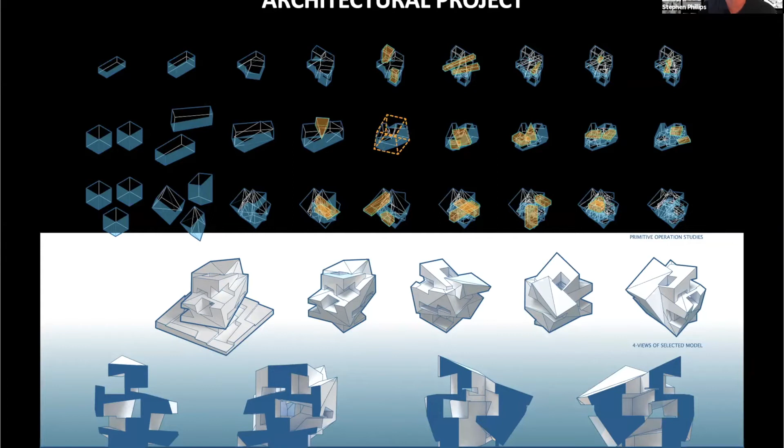Then we move into program and site. The building program is 600,000 square feet—a mixed-income housing, hotel, and office project. We also have social and health services, usually ending up on the ground floor, though placement varies by student. We have creative office space, retail, and a large public interior and exterior urban space, so it takes on an urban quality.

There's about 250,000 square feet of housing that includes micro-unit housing, transient hotel, boutique hotel, high-to-mid income housing, mid-to-low income housing, and transitional family housing. The services associated with that show up in our commercial and public spaces—public restaurants, cafes, retail, flexible creative office space, exhibition gallery spaces, and then indoor and outdoor public landscape spaces and parking.

The site is here on Main Street between downtown Los Angeles and the Fashion District, also very close to Skid Row, kind of in that transition between the larger territory of downtown and as it shifts towards more manufacturing and a lower density of scale.

The site itself, we took 12 stories as the FAR or height restriction. We also took about 50% porosity, which I'll explain in a second. And we took the entire site.

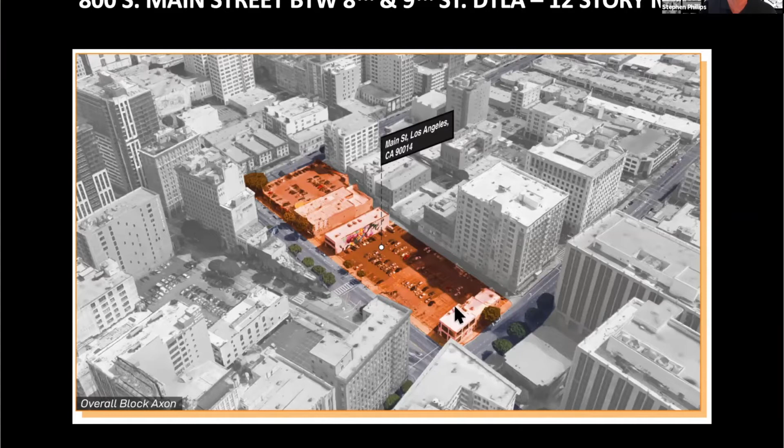It also has an interesting open space right in front of this territory, so most of the design is going to have elevational qualities as well as spatial qualities. There's an alley along the backside. This gives you an idea of Main Street, 9th and 8th Street, and the alley between.

We have basically a 625 by 175 foot lot, that's about 110,000 square feet. The program is 660,000 square feet. You're allowed to go up to 12 stories, so that enforces an engagement of open space and porosity throughout the building design.

That becomes sort of the creative architectural spaces of the in-between. That is really the conceptual part of the project. Every student has an architectural, conceptual, formal, material interest of their own, and then develops urban site strategies with a strong urban concept. It gets developed with an organizational programmatic concept that usually takes on a socio-political context, developing spaces in between of how you engage in that complex program dealing with density and varied community groups.

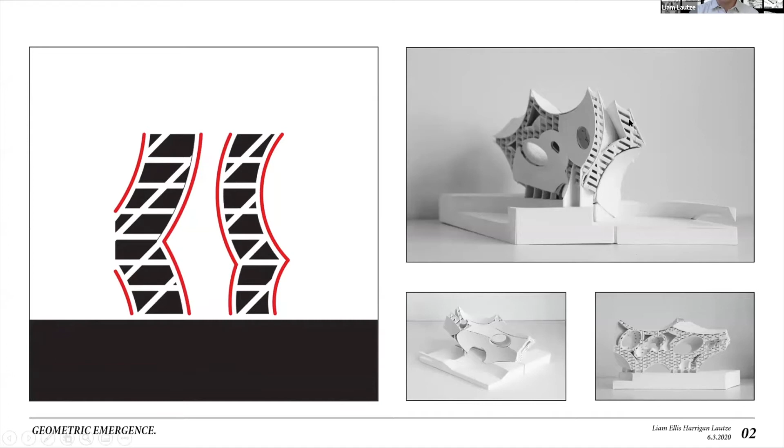The very earliest formal and spatial moves have been based on a kind of geometric emergence, where the interaction of a few spheroids in a grid create an exterior, an interior volume, separated by a semi-solid and gridded poche. You can see that configuration in the simulation model to the right.

These ideas are applied to the site of the project, which is on South Main Street in the Garment District. A diagonal and staggered grid is applied to the site, from which a set of spheroids subtract and create a second skin. Then another set of spheroids subtract more directly into the volume of the block with an intention towards affordance and program.

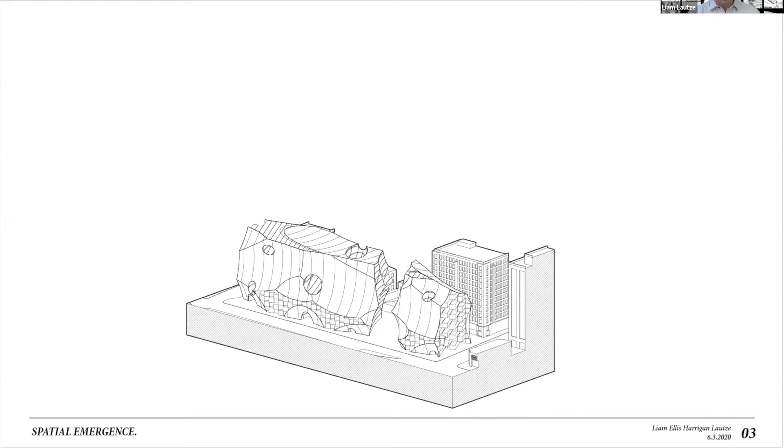That second skin is offset again inward, creating that same gridded moving poche and interior volume.

Now getting into the program of the project, it contains a diverse family of programs that includes multifamily housing, retail and office space, a boutique hotel, as well as job training and health services, as well as housing for people experiencing homelessness.

With this array of programs in mind, I wanted to understand each program's specific qualities in order to apply that same concept of emergence. On the ground floor is a job training program, a water storage cistern, and a flower shop.

The next 3 or 4 floors are commercial office space that partially bridge that interior void and form the ground floor into a kind of covered market.

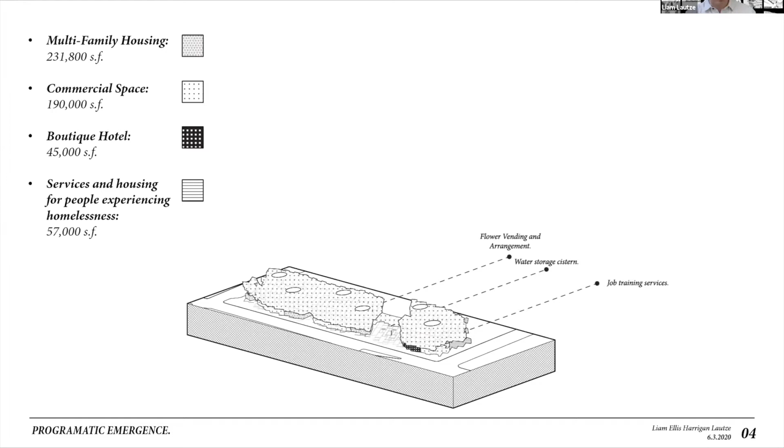Above the commercial offices is the multifamily housing, and these units can produce a significant quantity of water generated by the condensation associated with air conditioning.

Next, the housing for the homeless, or the transitional hotel as we're calling it in the studio, takes up half of the hotel chunk and contains a terraced flower garden. Last but not least, the boutique hotel takes up the remaining half of the hotel chunk.

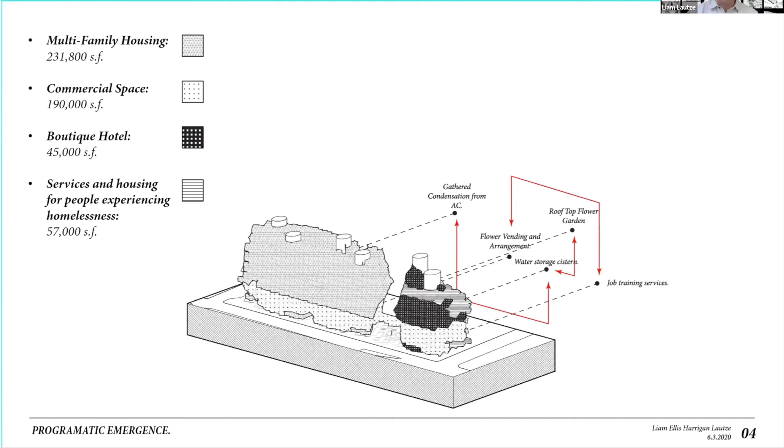Now we can begin to see how these diverse programs interlock, with the air conditioning providing water to the rooftop flower garden, the garden providing flowers to the flower shop, and that shop providing a venue for job training. This all emerges into a built-in self-sustaining job training facility.

Now that the greater programmatic whole is formed, the conceptual second skin and grid become a perforated metal facade and a modular prefabricated mass timber system. These come together to form Wave by Grid.

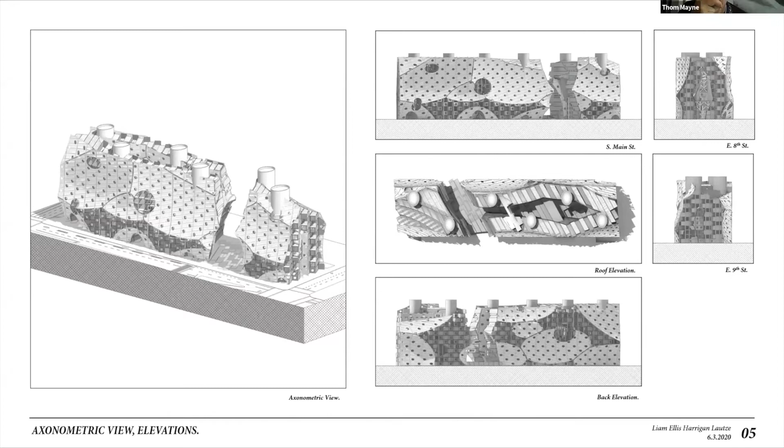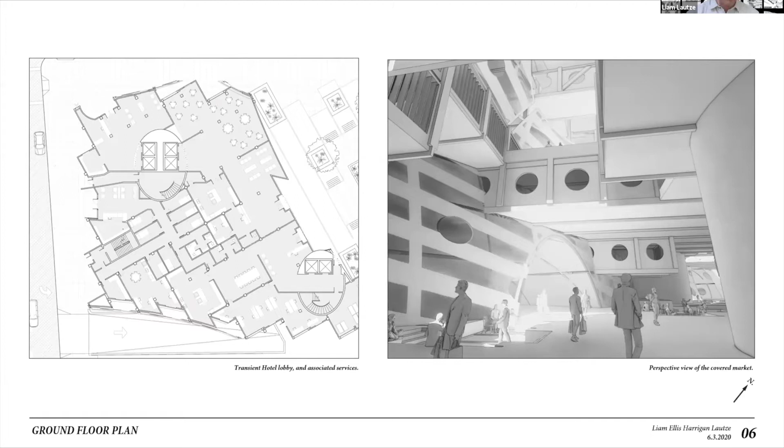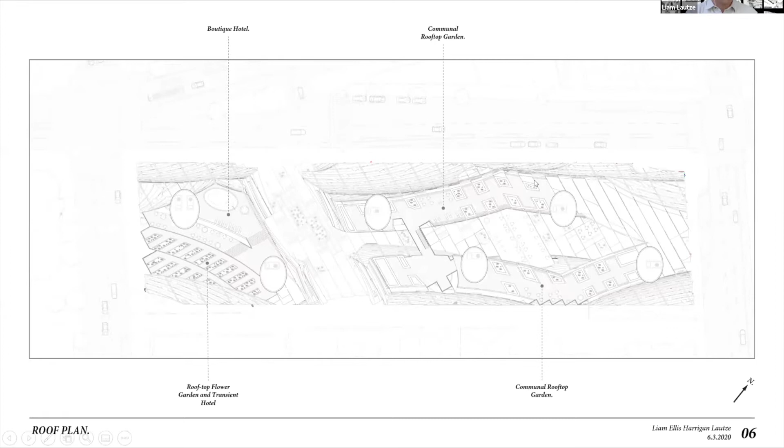And then last is the roof plan. You can see the terraced flower garden right there, along with the boutique hotel rooftop, and then a communal rooftop garden on the right side.

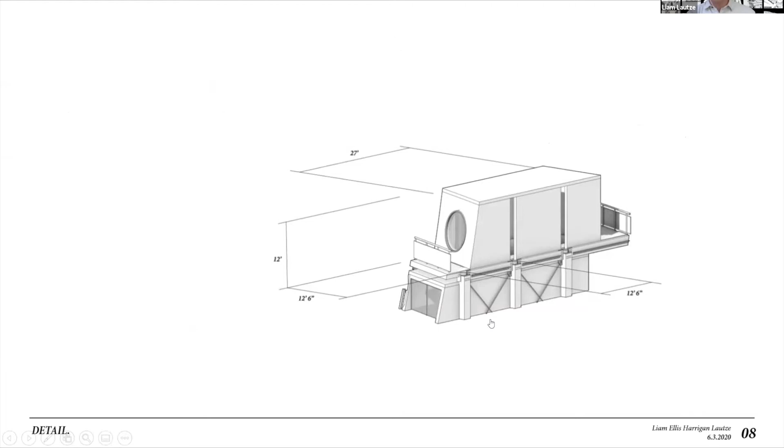Finally, I'll get into a sample of the modular and prefabricated construction system. A prefabricated CLT unit is placed on the layer below, and the columns are added, allowing the next layer to go into place before the skin is applied.

The exterior layer is an anodized aluminum panel followed by a perforated steel, held together by an HSS steel frame. So here are 2 details: the first showing a kind of generic structural sample, and the other below that showing how the skin attaches to that structural system.

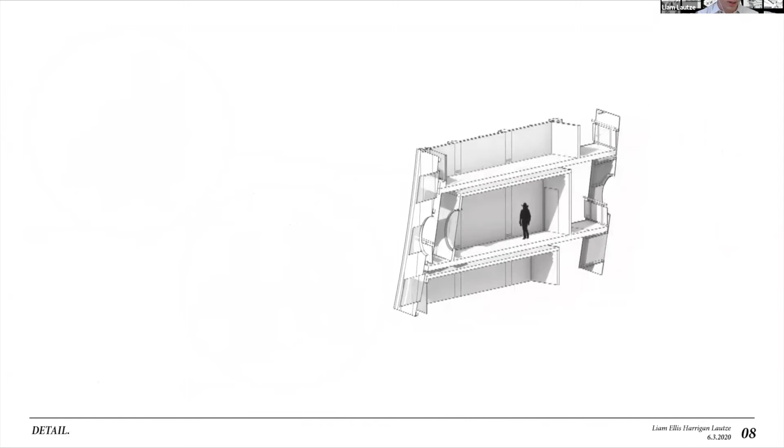Finally, a section of the assembly and a few final images, and I thank you very much for your attention.

I can go back to any slide for reference.

Liam, can you go back 1? Sure. There we are.

Well, I mean, there's obviously a tremendous amount of work here, which led me to the question of this must be more than a semester. I forgot, so that's awesome.

It's interesting, part of the project, I guess the CLT part, looks like a post-metabolist kind of architecture almost, and maybe it also has to do with the circles and, you know, obviously the modularity and the kind of capsule quality.

I feel like that's a super interesting place to start, given that the vast amount of square footage was really devoted to modular types of programs, mainly the micro housing, the housing, and the hotel. So I think that was a very intelligent way of beginning, and to tie that to a constructional system, being the mass timber, which, you know, is going up all over San Francisco—it looks completely beautiful.

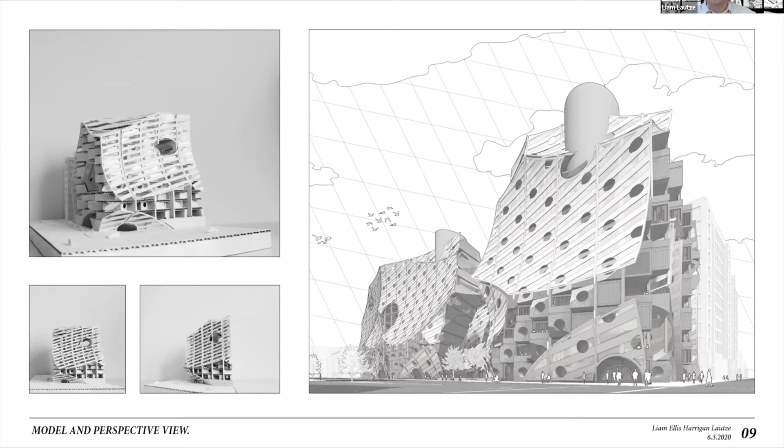Well, it did come from maybe what you're saying with the foreignness of it. It came from trying to create two separate systems that interact in an interesting way. They're kind of very visibly separate from each other, and it comes from that idea of emergence, playing on the sphere versus grid as opposites idea. I tried to introduce some internal Booleaning in these areas that happened in the original study model, or the simulation model, but fitting program around that made the cellular aspect take dominance, I suppose.

Can you go back to this section for a second? Sure. Is that all right?

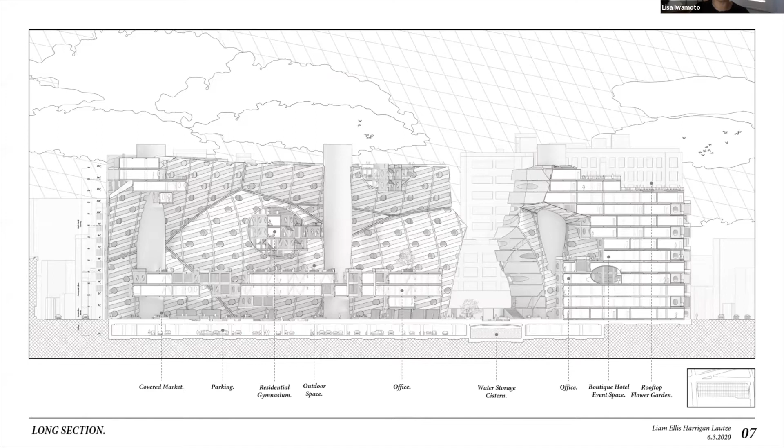So overall, there's a space between the exterior shell and the cellular unit. Am I reading that correctly? Yeah, what is that? Correct. And what's the idea of that space? It's meant to be a porch, or like a veranda for each unit.

You said something I really liked. You did also a nice job designing your building, but one thing you said struck me: you talked about people who experience homelessness, rather than giving them this stamp that they are homeless. I think that transitory state that's slightly more nomadic, impermanent, is really important right now, where a lot of people might have lost their jobs, but are not necessarily permanently out of jobs.

They just lost their job because of the whole pandemic, and so people might experience homelessness. I think it's really important that these stamps are not made on people, that they are homeless, but that there is a possibility to build spaces for temporal, transient states, as you call them, a transient hotel. Transient moments in life that are more flexible, not necessarily the normal crisis unit you would end up in. I think you're setting the tone here for something that should be starting to become the new normal, because people will go in and out of situations.

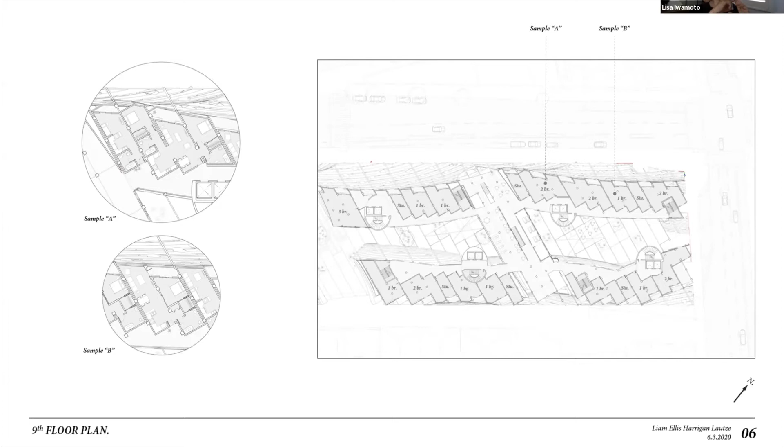One more, right here—this is almost enough for me. The building without the skin.

I'd like to tap into what Jimenez is saying about the stereotomic qualities, meaning the aggregation of the parts, stacked blocks on top of each other, and my earlier comment about metabolist architecture. I feel like the project is maybe at its best when it's an evolution of the metabolist project, which I always felt was quite difficult to synthesize into holistic buildings because of the expression of the individual parts.

I like the Boolean being the driver for how to synthesize it without necessarily needing the skin to do it—it's almost because of the sweep that you take away all the little tiny pieces that form these larger surfaces through that negative action. Sometimes you do that, and sometimes they're still holistic, like towards the bottom there. So you go from the aggregative moment to the synthesized moment, and it's legible because I'm still reading the grid through. I just love that.

I think that's so awesome. When you apply the skin on top, it's just an additive move that to me doesn't feel as necessary.

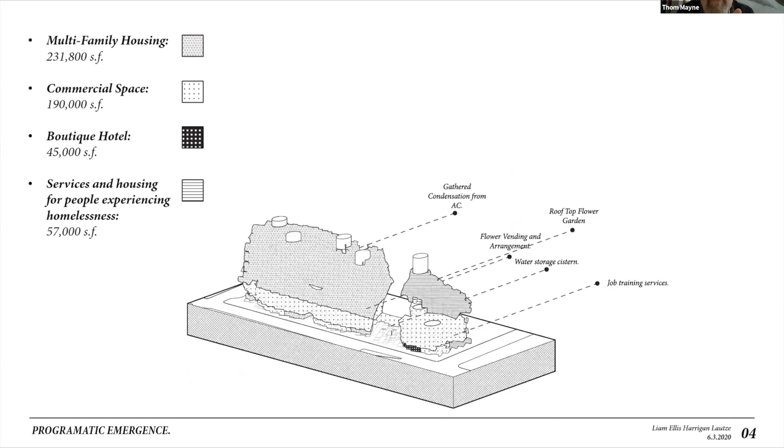Because I don't know where this came in. It looks like it came in fairly early, at the very beginning, where you put the image that's the strongest image somewhere in the beginning, and it's strong. This could be a museum. It could be the first one that shows, any of these.

And again, as you go into the mechanics, interesting idea, you went way back to Habitat or something, whatever you're looking at in the modular, but it doesn't give you these forms. In fact, it's the opposite. It gives you a very uniform idea, which you're going to kind of struggle against using a single increment. But it starts with an idea of economy and a system of building that connects to the broader social, cultural aspect, that starts with economics, of people that can afford it.

And it had a clear kind of program. And again, you get things mixed up, but I think it's because you're so early on in using your ability as an architect, as a shaper, a form maker.

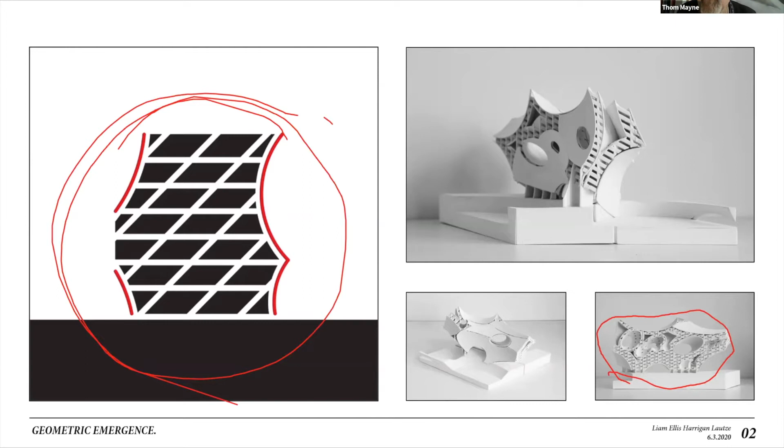This is why people don't like architects. I'm being very clear, right? Because it has nothing to do with the fucking problem, right? You should draw and work on your own, and you're good at it, make paintings, sculpt, right? And separate that from the demands of your work as an architect, because you're a skilled guy, right?

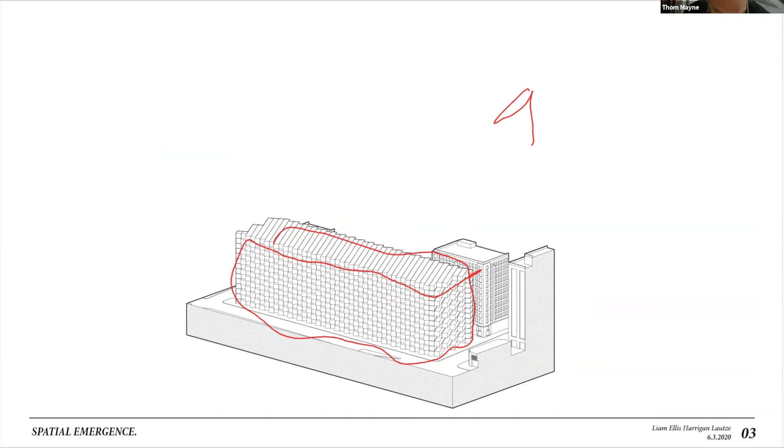Go back to the other one that's in the city that shows something in the existing building. But to me, it'd be the early questions you ask, and I would have challenged that. And then at this point, I think you're just looking at what were the numbers? 250K and 200K and 50K, and you're just telling us that's how much stuff I got to put on the site, right? And it's giving you some notion, this is my problem, in this context, plus whatever other context it is.

And it's the first thing we're looking at, okay? And we're deciding too much stuff, or we're defining the problem just at an urban level, meaning I could do this and leave this empty, et cetera, right? But you're just, and then what's the next one? Yeah, and then boom, you got a project, right? And it's fine, I'm not going to argue with it.

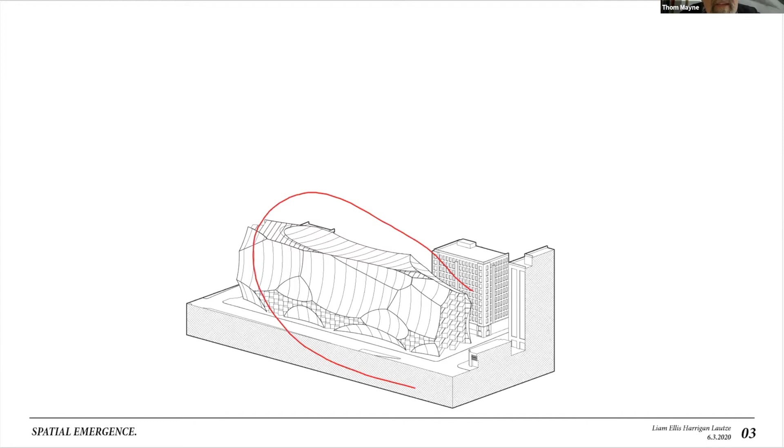It's an idea of subtraction where you're taking that, and you're developing a particular language that has a coherency to it, et cetera. But now all kinds of questions come up, because the things you're doing are stacked. They already have inherent orders that you're going to struggle with, and you can do this, or you can do this, or you can do this, and on. But you do know that these are cellular in one place and they're not in another. Again, I think early on you have to be clear in the project you're going to tackle.

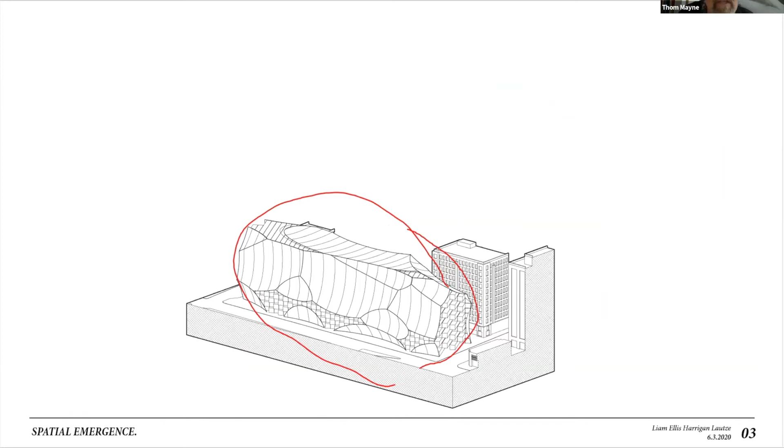This is what differentiates this piece of work from your classmates, and this will come out of it. It'll be a negotiation of things that you're interested in doing, giving things some sort of specificity, whatever this means. Because again, I would have looked at this and said, wouldn't this have to do with some force urbanistically? I would be looking for some notion of the arbitrariness of that, or the more purposeful nature, because you could do 1,000 of these, right? You could script this, you know that. You could script this and look at 100 of these in 15 minutes. I probably should have, yeah.

The more you're demanded to ask questions of what am I doing, and what is the response of this, of these forms, to some idea that I'm struggling with.

I guess if I was going to jump in and comment on what I think is important, it's also a thing about being a fourth year student. I would even argue maybe you could blame me for some of that, but I always have them do a formal study without the notion of program in sight. They had no idea what was coming. And then they have this bizarre thing that someone like yourself, Thom, who's spent a lifetime developing interests, and you have them—these are young characters that often will just grab a form from a magazine they've seen, or pull out an image from the past, or make a box because that's what they know.

So it forces them to have to deal with some architectural interest, whatever that might be, and have this whole experience you're describing to reach this level, I would argue, so that next time maybe they won't do that, but be able to understand that the formal investigation has a programmatic value, instigated through site and program, and it's available to what's appropriate. You have a language that you use.

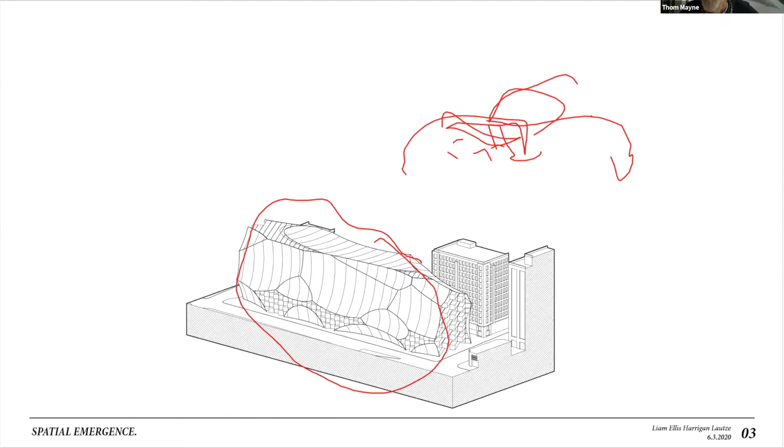The design, everybody up there was shaping things—irrelevant, wrong problem. I guess what I'm saying is you need to be more first principle. What are the problems you're struggling with in the design, that you're using your talent, your design talent, for shaping it and giving it specific form? What is that solving? Because on its own, I think it's just not relevant. It detaches you from the actual conversation of the real project.

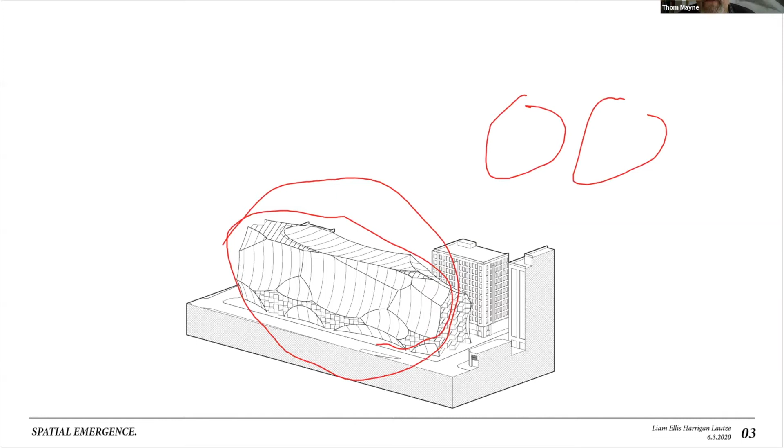You're putting homeless people in here—that's the project, right? That we can agree upon, and that's one of the elements. It requires something maybe much simpler in terms of design versus a particular shape. Does this shape work for any project you're working on? It could have been a museum, a shopping center, a theater complex, or housing. Of course not—you know that. You're smiling at it, right? You're negotiating, making an alignment between some particular idea and its program, and you're doing that very early on to allow you to get to this point to have an intelligent conversation.

It's an incredibly skilled piece of work. I think everybody here agrees with that, right? Yeah, absolutely. Thank you—I just want to add to that.

I teach at Berkeley, and I think the questions—maybe it's the kind of students we get—always seem to fall into larger societal and cultural questions. I find there's always that struggle between what the architectural project is in terms of the language aspect, and what it is in terms of the cultural aspect, I guess. I personally think it's okay to start with a formal question here, because the formal question had to do with the relationship of all these cellular pieces in this particular case and the larger urban spaces.

Basically the community spaces of the building—but that's not the problem we're going to solve in this review. No, but it's interesting to bring these characters together who can all agree on this, and to see a different image of it when it's in the site, when it's completely done in the site.

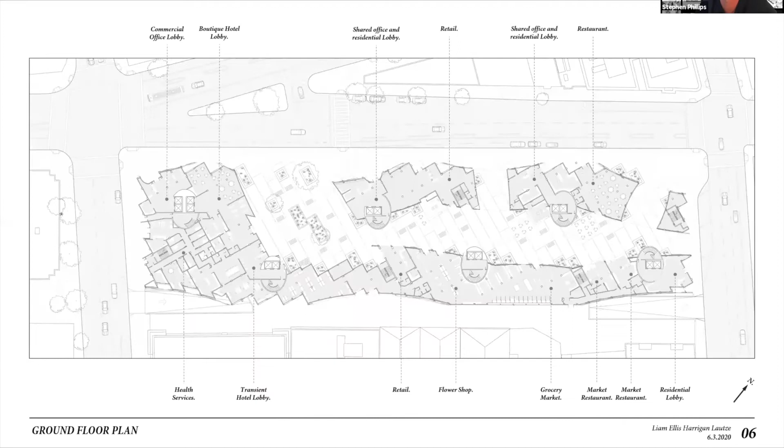Do you have an actual image of the actual art? It's coming. With the context, you look at that and go, well, it's bold, it's interesting, it's well developed, it's provocative, he's gotten down to different levels.

Is that appropriate? Again, you've erased all the site context here, but I've seen it in analog models—I don't know if you've got those analogs. It's just very impressive, but I agree with Thom's point too: is this appropriate for a homeless hotel slash creative office space? I don't know.

It's an interesting subject, and you did an enormous amount of work—you've learned an awful amount of things you maybe wouldn't have learned otherwise had you not been challenged from the get-go with that kind of weird thing you did. Then coming down to the CLT even as a solution to a structure of a form—it's just very interesting. So I applaud you for everything you've accomplished and the hard journey you've been on, especially in the times we've been in. Thank you.

I don't know if anyone has any last comments, but we can probably move to the next person.

Yeah, Rafael? Raf? Hello, everyone. My name is Rafael. I want to first thank everyone for being here. I'll be presenting my project entitled Pleat in a Box. I'll first go over my context and concept, followed by my design and technical drawings.

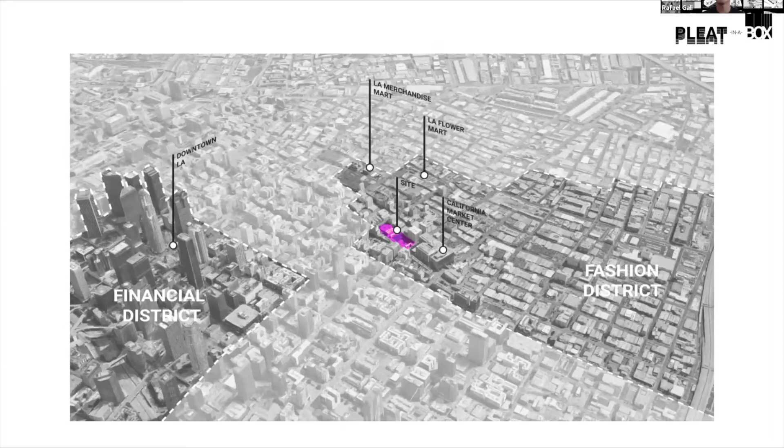As Stephen briefly mentioned, our site is on a unique edge condition connecting the downtown financial district and fashion district. As you move left to right, you have all these important landmarks and marketplaces of the fashion district, and our site presents an opportunity to be a piece leading in as it sits on the northwest corner.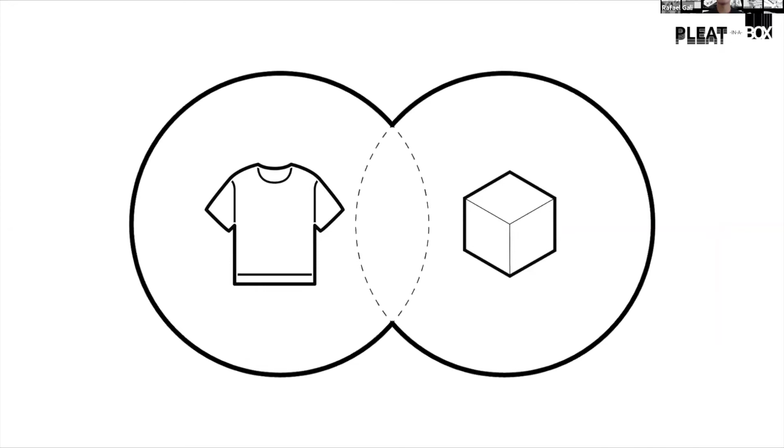From a site context and fashion clothing aspect, my approach questioned relating clothing with architecture. You can think of it as two distinct spheres of reality sharing similarities, but I can also see it as synonymous.

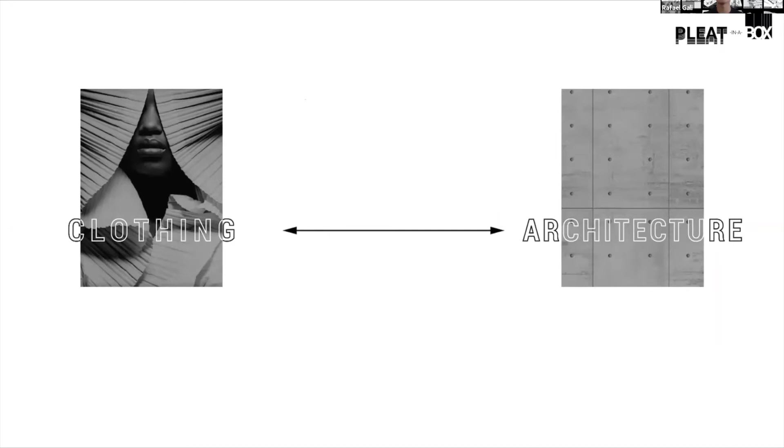So now the question I'm exploring with this approach is to connect the two. In both cases, an architectural designer can approach design in the manner in which a fashion designer approaches clothing, in which case both shelter and protect the user group, are centered around human proportions and scale, composed of skin and structure, have entrances and exits, and are very detailed.

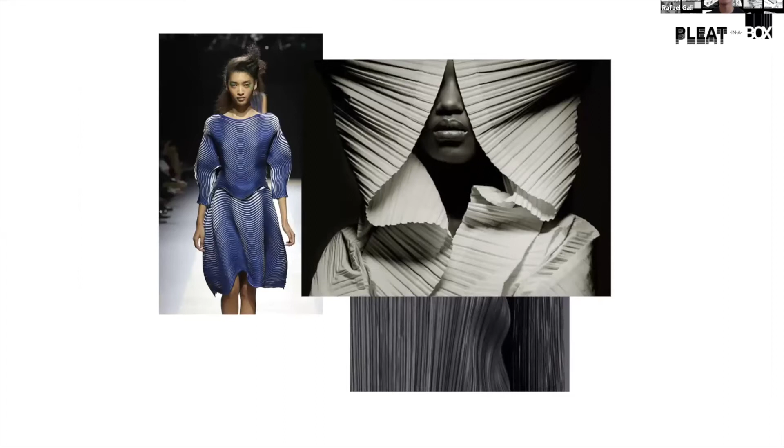I took inspiration from fashion designer Issey Miyake, who develops geometric fabric and patterning, more specifically the fluid patterning of pleated fabric. This essentially becomes a new architecture, an architecture of clothing, or in adapting this, a clothing of architecture, so to speak.

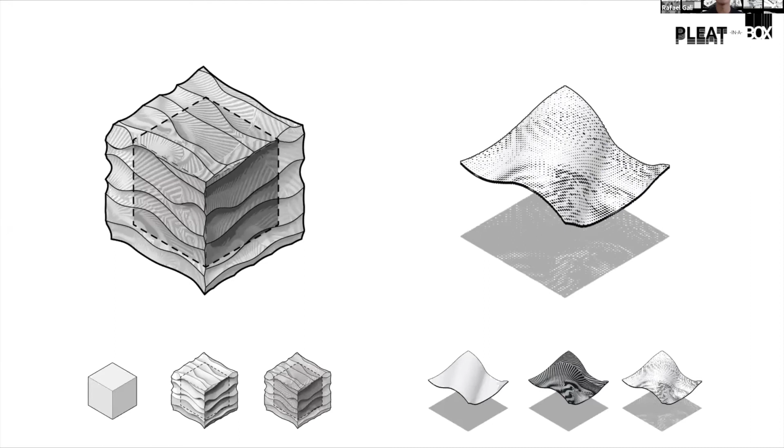When thinking about architecture with clothing, I explored fluid carvings of an exterior, which would later become a facade, then texturing the outer skin. In this manner, the facade would become a perforated screen, which in shadow would replicate the textured pattern. So the combination of the two, molding an exterior skin and texturing it, comprised my approach.

Looking in depth at our site, there's a strong presence of fashion, retail, marketplace, and design showrooms, such as the California Market Center, Newmart, and Cooper Design Space.

Parking would be located underground with 4 main cores, now establishing the footprint of the site, utilizing the circulation from Spring Street to bisect the volume, connecting the two volumes intermediately, offsetting some height and depth, introducing some central atriums.

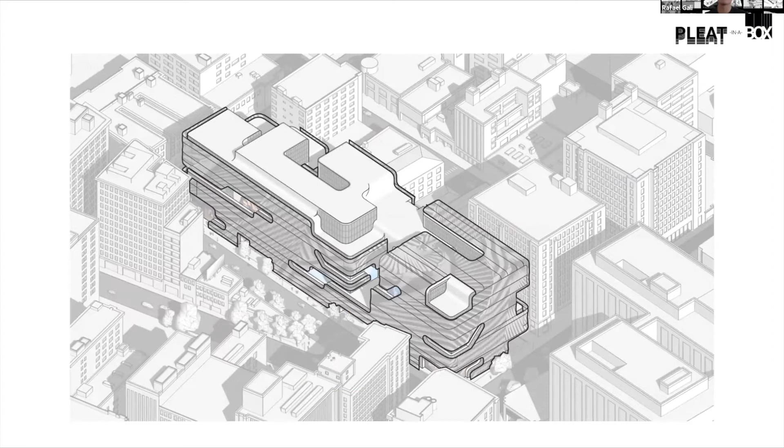And a courtyard to bring light into the space, reintroducing lights, cracks and fissures, and incorporating a media facade in the openings, adding balconies for the housing units, exterior structure, and wrapping the masses with textured patterning and shell. So the wrap of the exterior would characterize the reading of the volume as one whole connected volume.

Here's an overall render with the media facade. Entrance into the main hall right here, valet drop off on Main Street. Here's the view from Main Street and 8th Street, as well as from 9th and Spring Street.

Cores stemming from the underground parking structure, with a freight elevator in the back. Valet access off Main Street, with residential and office parking off 9th. 3 main private elevator cores for housing, and the green public elevator core for office.

That isn't to say these housing cores don't service the office floors as well. It's more so that these ones are just dedicated for office entirely instead of housing.

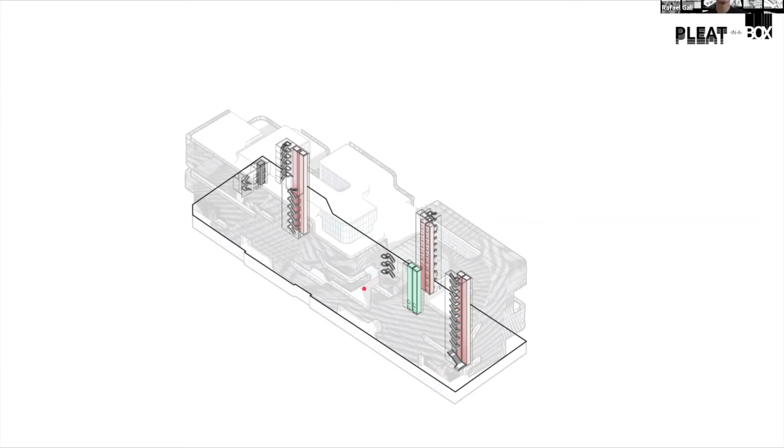Looking at the program on the ground floor, you have public event space with retail, dining, and lobby. We have a breakdown of the spaces in zones, so showroom and corresponding pre-function and back of house accessory spaces. You can see the freight elevator connecting to the parking garage, servicing this area. Retail and wholesale retail flanking the market hall with the atrium above.

Dedicated residential and office parking. Valet coming in with the circulation from Spring Street. Lobby connecting the market hall into the semi-private residential sector.

Moving along as we continue up to the main office floors, this is the third floor. 4 different office suites with a connecting cafe, lobby, and lounge surrounding the main atrium. 5th floor and above is where the housing is introduced, so this is the 10th floor where we see a typical housing plan.

So I've categorized 3 distinct towers, if you will, which have different large, small and micro unit sizes. The boutique hotels are on the far east side.

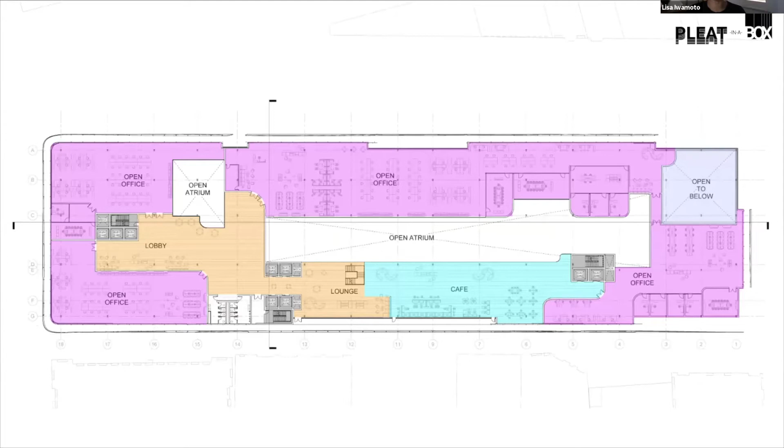Your voice is cutting out a little bit. Is there a building right here? Yeah, for me as well. People missed a lot of what you were saying for the last second or two, but you're back now. I apologize. No, I don't think it's you, I think it's the internet. Okay, let's continue from here.

If you notice, the housing units are connected all circulationally. This being so to imply that the housing units and hotel can expand or overflow depending on occupancy, season, usage, etc. Sometimes, like when the hotel is not being used, it can function transiently as temporary housing spaces, or vice versa.

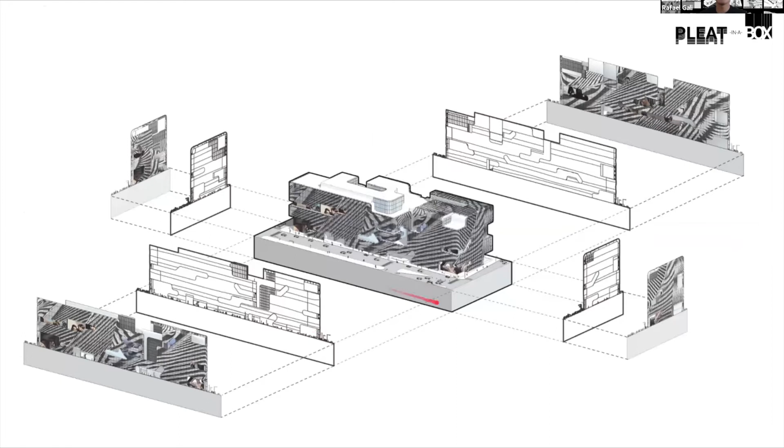In longitudinal section, you can see the 2 atriums that open up into the light, into the main market hall, retail, and office spaces, and how it breaks up the housing and hotel areas.

Cross section cut right here exemplifies the 2 cores, the office core and the housing core. So the lobby atrium is right here with the vehicular axis and that light over here, and housing and office situated above. Hopefully it's better illustrated through this 3D section.

Again, this is the Main Street. If we zoom in on the 4th and 5th floor in the small details section, we can illustrate how the facade works.

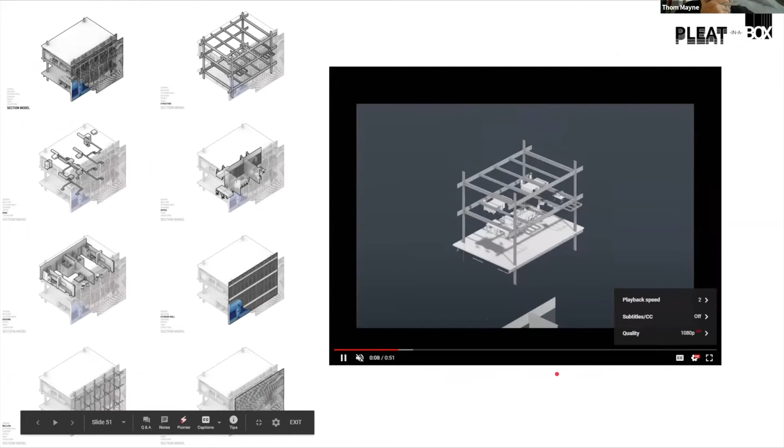So we have different elements of structure and HVAC, office and housing program. There's the housing and office below, and the HVAC ceiling.

And then this is the exterior facade where the digital media board opens up in the openings of the screen.

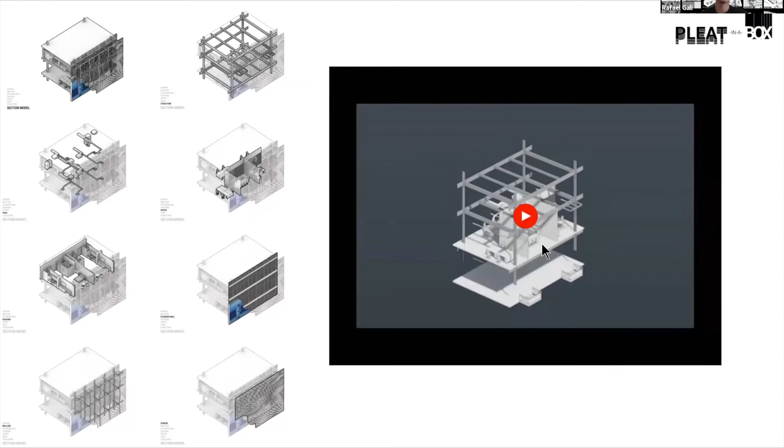Looking at a floor plan of such, the balconies inhabit the intermediary space between the private housing sector and the public visual screening element.

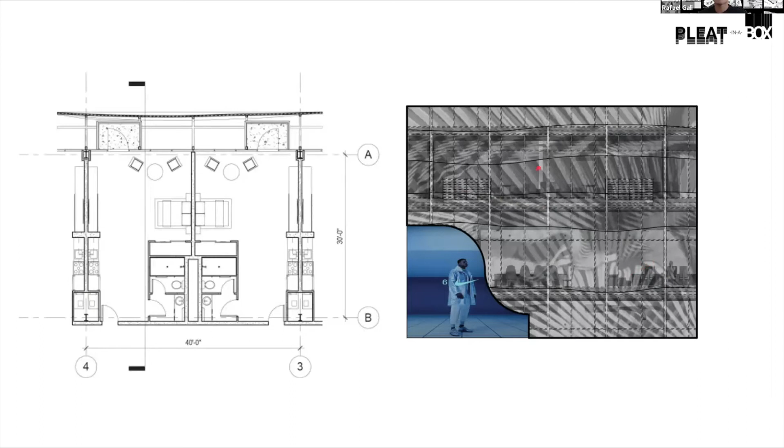So there's an elevation of which you can see the office and housing up here. Typical long detail of the office and housing floors, nothing special.

Finally, a couple model photos where I also explore texturing the exterior with reflective and concentric patterning, elevational and longitudinal studies representing the interior volume.

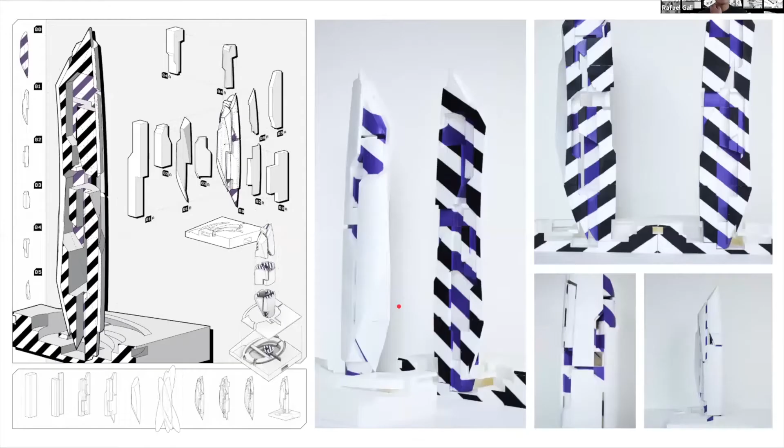Furthermore, this texturing and the reading of the exterior-interior volume I explored in the earlier dissimulation formal exercise that played with forced perspective and various cracks and fissures, how the pleat alters how you read the spaces and would line up in elevation. Basically these textures and fissures would carry over to my progressed design.

I mean, maybe I'll start. You know, in a way, I kind of wish you didn't mention pleat, because we could probably just have a conversation about your work for exactly what it is, rather than what it isn't.

I mean, other than some kind of graphic application that looks very post-rationalized, I don't see pleats at all. I don't see pleats at all, actually.

I mean, to pleat something, typologically there are so many ways to pleat things, but it changed. It involves folds, creases. It even changes the structural property of the fabric. Maybe the conversation would shift in a different direction, but off the top, I don't see any connection with pleats.

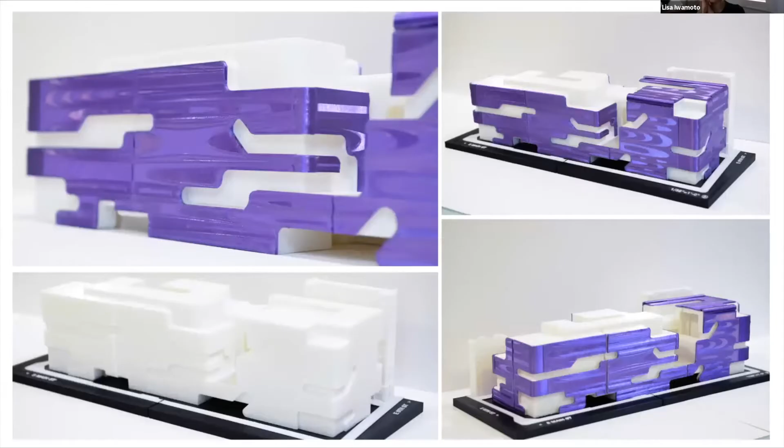As you were talking and I was looking over the context a bit more, I mean, it's a huge site with a really big program and a very generous FAR, meaning, yes, you get a lot of porosity in there.

And it is assigned as a single project, but what's really nice about the long section is I think there's an understanding here of the size of the site and the above-grade portion looking like it's a set of buildings that share something in common, which is its language, but is also very diverse, meaning each of these different buildings in this section look like they could be quite different typologically.

Like one's more a tower, one's like a floating element, one is more object-like in the middle. And that stands in contrast to the exterior expression, which is definitely, especially with the wrapping, trying to make one single large building.

And when I look at it in relation to the context, I think a really interesting problem that the project presents is how does an architect design for a site this big, with a program this diverse, and deal with it through an overall strategy.

So the long section is presenting something really different from the plans. The plans are more like a mall almost. It's very internalized. The main circulation and access to the program, particularly on the ground levels, are through the interior.

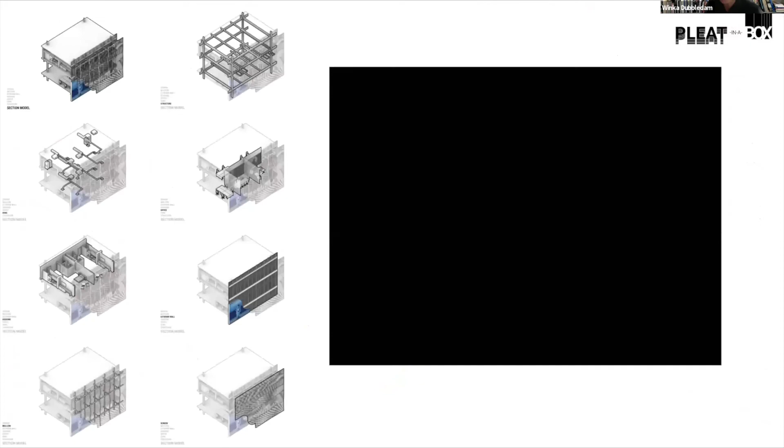Regarding the pleats, I was thinking that too when Thom was mentioning it. To me, it's more the kind of pattern that aircraft carriers have to be completely invisible, the razzle-dazzle pattern, which means that from the air you can't see them because they start to look like the reflection of light on waves or whatever. Your project has a funny quality like that, which with this program would actually be very interesting, to think of it more as a camouflage idea rather than a fashion idea.

And the building could appear and disappear at moments where you want it to happen, which is actually a very interesting strategy in a big urban site that is right on the edge of different neighborhoods. So you could really play with that notion. As you have the contrast of the camouflage pattern and then the big photograph sliding behind it, which I think is a very nice thing you did. So I think there are some really beautiful things in your project.

I just think that the idea of clusters would have been really important to also see in plans, the kind of clustering of the programmatic chunks as you have them.

Yeah, I guess I could take it one step further, further integrating the whole pleating idea, especially redoing the facade, because it's almost torn between the whole razzle dazzle texturing or the entire folding geometry. So it's either or. Yeah, I think the more extreme you are about it, the more fun it is, no? And it would have to wrap on the roof, I think.

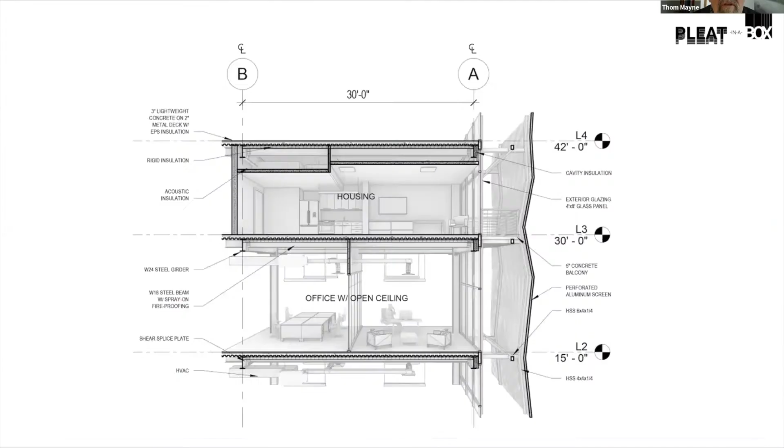Thom? Could you put this in context? I'm a little bit lost on this one. How did that — where is this — connect that piece to your project? The dissimulation model? Yeah, what happened to that?

That was the initial formal exercise. I didn't take it per se with the entire formal geometry, more so just the texturing and the patterning, because we're going to see all of your schemes already — you fill the whole site.

And I'm looking at this, and my first question, thinking of it coming into the studio — I'm looking at this block going, there's kind of too much program for this site and issue. And we're going to immediately look at just massing. It's funny, the first thing I thought about is, is anybody looking at this and keeping this open? I mean, just quickly looking at really different urban massing schemes.

And there are some different approaches. I would have been on this one, besides the fact that it happens to be a typology that's going to link with housing, that portion anyway. And you can do more than one.

It goes back to: if you're using an a priori formal strategy, what most architects won't tell you is there's already a huge implicit agreement between a connection of that form and what they're doing. And we don't have to talk about it, right? It's not arbitrary — you come into it already with a huge amount of information that there's a linkage between this somewhat purely formal device and the thing you're solving.

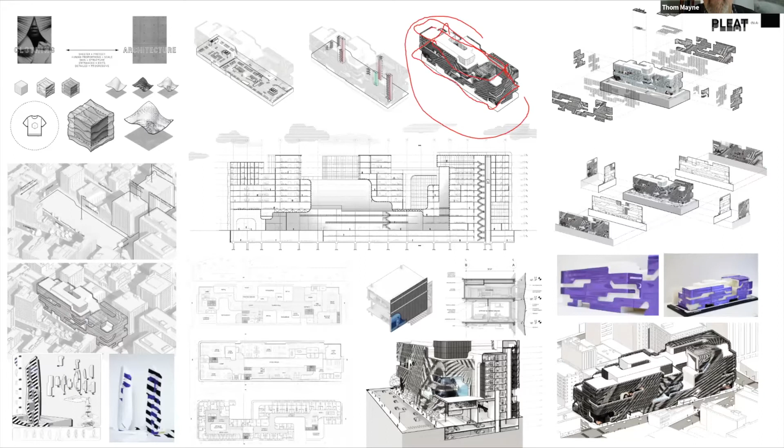It freed you up into a very different urban strategy, and you ended up with the box again. I'll have to see more schemes and how you guys differentiated, because if you looked at all your class's schemes, the first thing you're going to look at is the difference at this level, the various ideas of how they break it down and what that means to the various performances of the functionalities, starting with the housing. I'll look at them as you go along, but it seems like this automatically gave you a really interesting direction, and it was already quite the erasure of the facade.

I should also say they were given a 12-story limit this year. If they wanted to break that rule, they could have, but they would have to have wanted to. And it's because I guess we did towers before, you've seen our towers before at the A+D, but this was to push into horizontal. So we got to deal with maybe more spatial landscape in a different way.

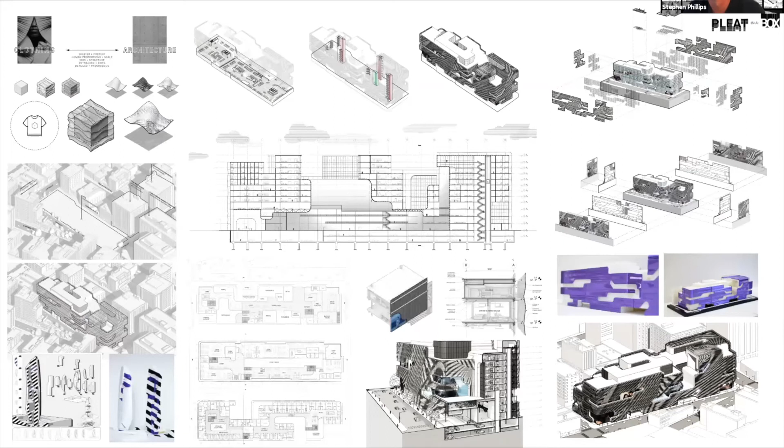Any last comments from the critics? No, tremendous amount of work. Again, congratulations. Really great. Thank you, Rafa. It was very impressive, and you worked through a lot of things. I know this was not so easy for you to get through to it. Great timing, did a wonderful job.

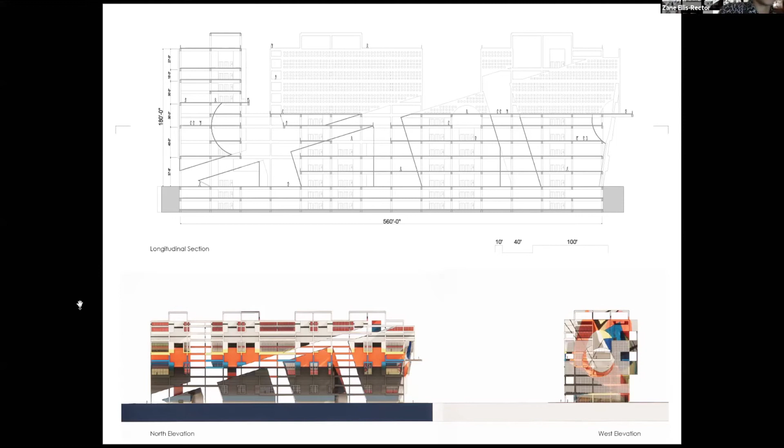As you move through this, you're inside a building, still inside, but now you can see outside to the city. Then you're back inside a building with its own little spaces. Suddenly you're back in an open, communal space with possibilities for whatever. And then it's just that linear path, hacked at by the interjections of circles throughout.

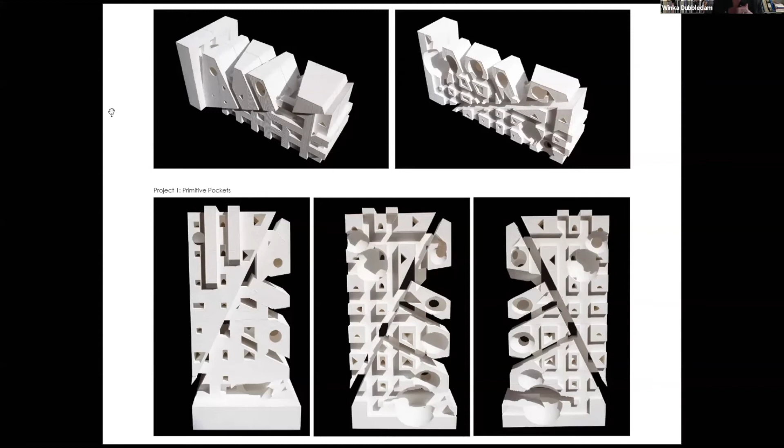You see the top left, that's what I'm talking about—the top left had a smaller grid, you see the smaller grid on the bottom and then larger chunks on top. It really helped your diagonal, because when you showed the very first image where everything was still white, I did see a trace of your diagonal, which I liked. But I was thinking, wow, that diagonal is not this one, but the very first one they showed. Maybe this is the first one—sorry, the second one, I think. Go to the next one.

So I was seeing this diagonal, but the diagonal is actually struggling a tiny bit here. This line that you have that's very strong here was struggling a little bit, and I think it's because of what you did, these chunks have more defined sizes. If anything, I think you could bring back, and it's still a little bit here, this has a different rhythm than that one. But the more you get into your project, you hyper-define all the smaller differentiations and detailing, then it becomes more of a mass of small things, so your diagonal starts to really struggle a bit.

I still think it's a really, really nice project, and the last image I really love. I think the idea of the almost graffiti-like painting, where a column could be one color and then differentiate into another column, these kind of areas, I think is really, really beautiful. Painters would hate you like no tomorrow, honestly, what are you thinking? But I think it has something really interesting because it kind of defines or defies the normative.

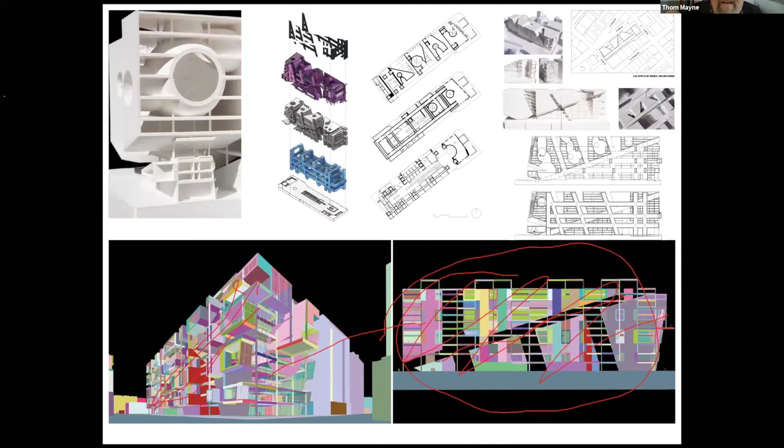That's just an early study, right? That's not the same thing. It's an early color study, so it's the same building, but is this in here? Yes, it is. Go back to the last one we were just looking at. The last rendering, right? That's someplace here?

That is, yeah, so it starts from here, if you can see this line. Well, it's funny, it's not even vaguely evident. It's funny, for me...

What's interesting in this last image is in a world today that's so highly visual in a graphic sense, I'm thinking of the current educational environment, I look at this and it seems to have so many qualities that are very architectural, depending on tectonic and the description of structure and of construction and building that makes it quite different than the rest of the images. But the sense here is you're using very basic architectural qualities that connect to construction that for me differentiate it completely, and they're using that as an aesthetic device, unlike composition or the graphic stuff that's so common today. Does anybody else sense that?

I look at this and its qualities are developed by a very kind of convention that we understand architecturally. Yeah, totally, and that's exactly my intent, is that I wanted to be super, using the basic tools, but making it interesting and piquing curiosity. The relaxedness would be closer to a Richard Rogers or a Grimshaw or somebody that isn't interested in those things, that the qualities come out of the build and the constructional technique.

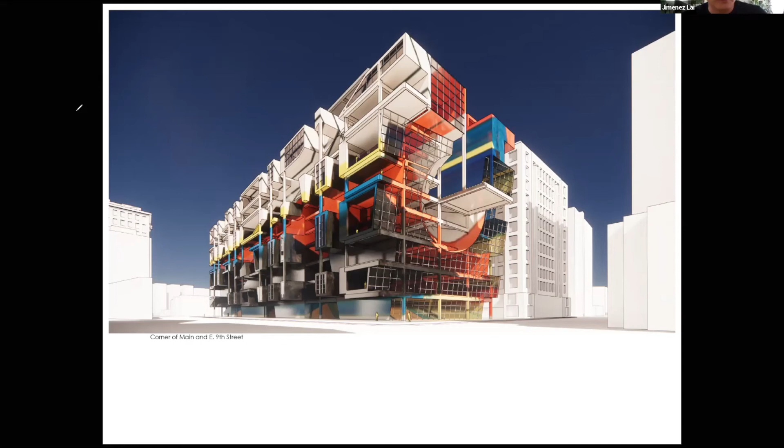No, thank you so much. And you guys honestly put into words what I was thinking so much better than I could. That's something I need to work on 100%, how I articulate my thoughts. So I thank you guys so much for having the ability to provide such thoughtful critique to what I presented. Thank you so much.

Hey, thank you, Zane. Even your ability to summarize your own review has been a pleasure. You're extremely affable and personable, and you really engage in every single conversation we've ever had in studio and class. You're always a participant, and I'm a little bit on Lisa's side in terms of how I understand stuff, so I won't say it's always been clear to me what you're working on and why.

Even though I loved the initial studies, I loved the way it worked. I liked the midterm maybe a little bit more than the final, but I love the final image. So I'm like, wow, because I also have the same comments Winka made, there were some really interesting moves that got lost. I'd love to be able to continue that journey and figure out how to make it a great building on that level. Your presentation, I think, is also part of who you are, so it's like a meandering thing.

Articulation is good, rigor is great. I think there's a lot of rigor to this project. Keep working, thank you. And we have one more.

During my dissertation studies, I became interested in looking at how interlocking character-like volumes could start to confound foreground and background relationships. With this formal language, I developed an urban approach that creates permeability at the street front and protected public spaces, and ultimately seeks to contribute to the urban life of Los Angeles.

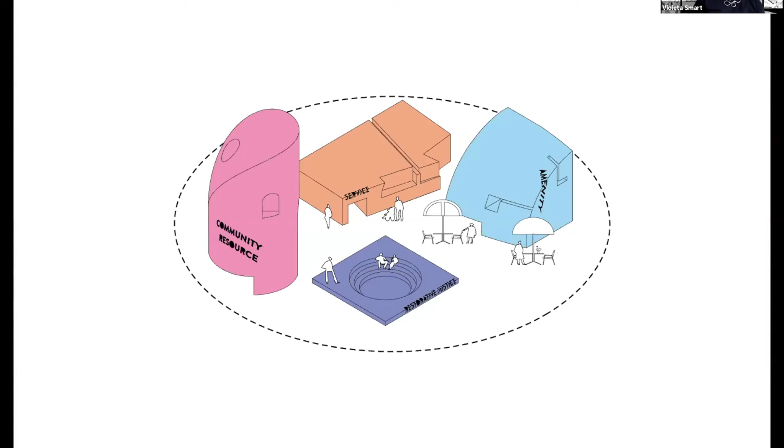I developed the idea of villages, hubs of activity and interlude that would be plugged in at the intersection of different housing programs and housing typologies to bring different demographics together and create a meaningful sense of community participation and inclusion. Villages would be composed of a service program, a community resource, an amenity, and a space for restorative justice.

Restorative justice practices promote the reconciliation of a community after a crime has been committed by bringing the offender, the victim, and members of the community to a conversation. These spaces are about bringing people together to promote reconciliation and remedy.

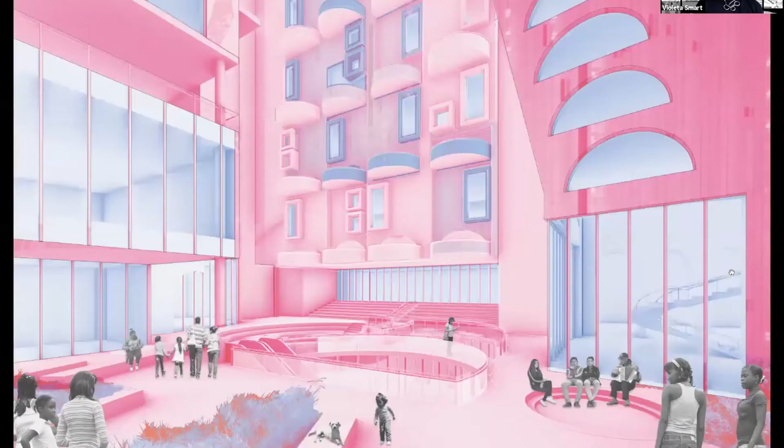The following images show some of the villages and their relationships to the adjacent programs. For example, this is a village I described earlier, where the restorative justice space, the cafe, business incubator, and LGBTQ center exist at the intersection of the creative office space and the transient hotel, to bring people who wouldn't overlap in their daily lives together — someone who's a young professional and someone who's experiencing homelessness could meet at this space.

This village shows how the villages create public, protected spaces at the ground level. This image further illustrates how interlocking, character-like volumes of a village can create elevated public parts that encourage people to gather and socialize.

This village exists at the top of a retail space and is overlooked by transitional family units and more permanent ones. This is a perspective view of how the inside of the village would look.

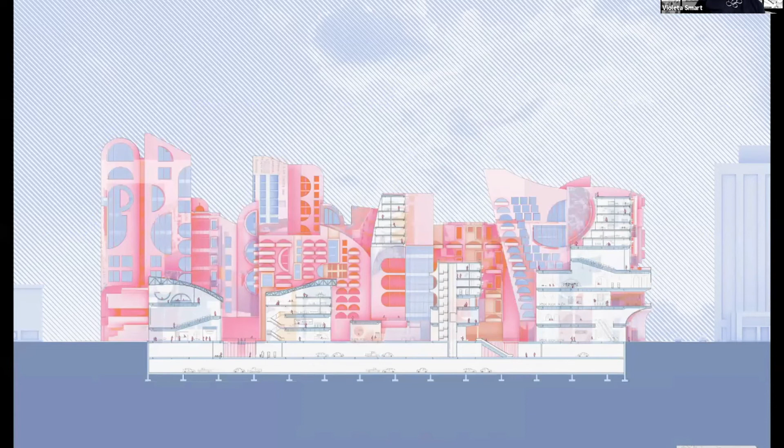This drawing shows a section through what I like to call the first scale of the building. This portion of the project meets the street at a section-like condition to maintain the street edge while also creating permeability and a smooth transition between two protected public spaces on the street. The first scale houses high activity spaces like retail, micro-unit housing, and hotels, and these are some of the spaces created during this first scale.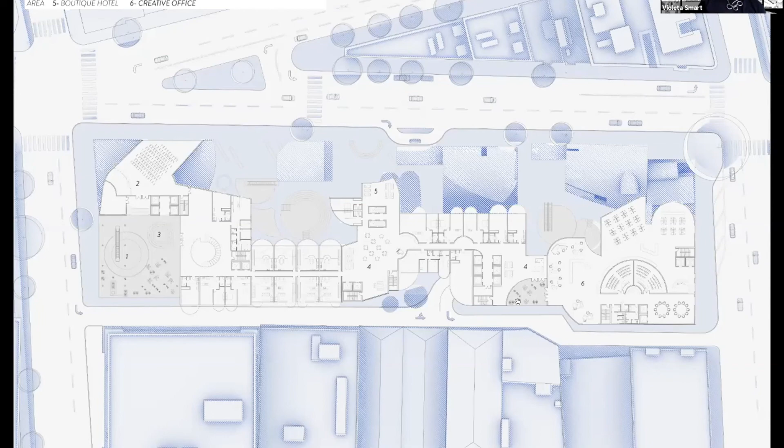These are micro-unit housings with their respective community spaces, both overlooking this public amphitheater at the ground level.

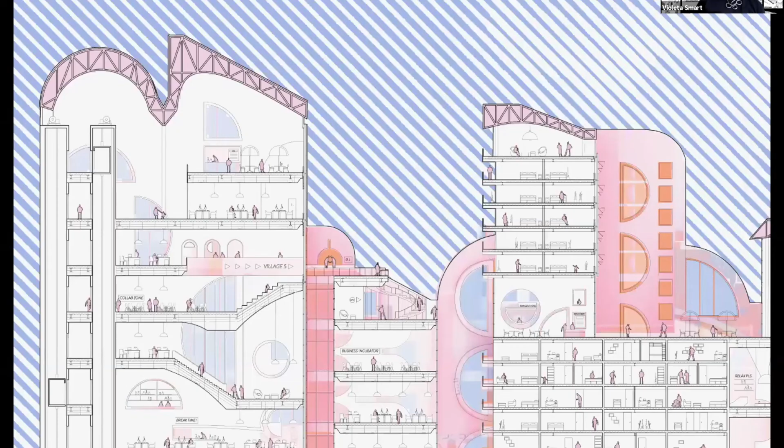So to close up, I would like to highlight that this project presents a complex set of communities and programs that find interactions and relationships through an architecture that both expresses their individuality and complexity while seeking something holistic, both in the community and in the architecture. Thank you.

And here, go to one of your first very beginning schemes. I mean, you're interested in an urban idea. And I'm not quite sure after that, the people you're looking at, because it's clearly interested in some idea of village clutter, or what do you want to call it? It's a very kind of urban idea that has to do with breaking down spatially kind of ideas of a particular kind of urbanism, which is highly differentiated and highly idiosyncratic.

And then after that, I was kind of writing down names going, is this kind of a Moss thing where it's cheek by jowl and it's irrelevant, or they're purposeful non sequiturs? Or is it close to Frank Gehry, who's going to find a language that does this, and there's going to be some absolute coherent language that finds this kind of urban structure and the kind of differentiation you're looking for?

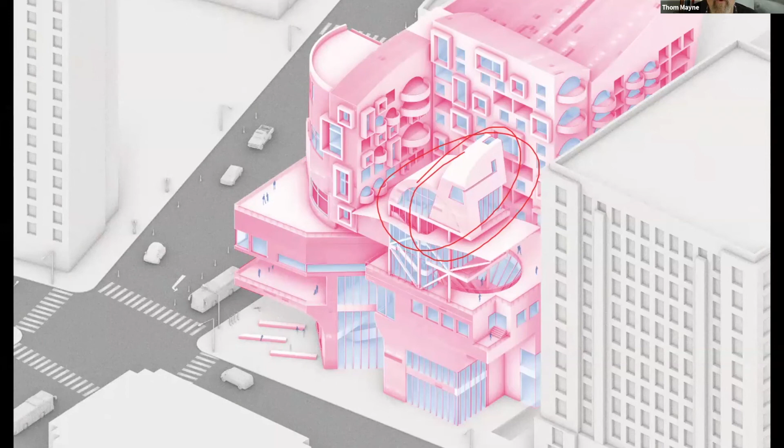But it'd been extremely useful if you'd have started with public space. And in yours, it seems to be extremely interesting. I don't know where we'd look. What's the one that would show most? What I would have thought, one of the first things that's extremely interesting, it's not on a surface.

It's not public space in its conventional sense. It's three-dimensional public space, right? That you volumized, spatialized the public that connect to these things. And it seems to me you could have gone through and literally discussed a new notion of public, right? That makes this urban construct.

And it would have forced you to think about vertical movement at two different levels, right? One at a public level and one more at a semi-public, private, public, whatever, right? Make sense? It would have been extremely kind of helpful, and you could have spent less energy on the formal.

That's fine. For me, it's even kind of in a way irrelevant. It's not my thing. I would have looked at something a little more disciplined, or again, it's another, maybe a separate conversation. But the big urban idea is completely different than the ones you looked at, right?

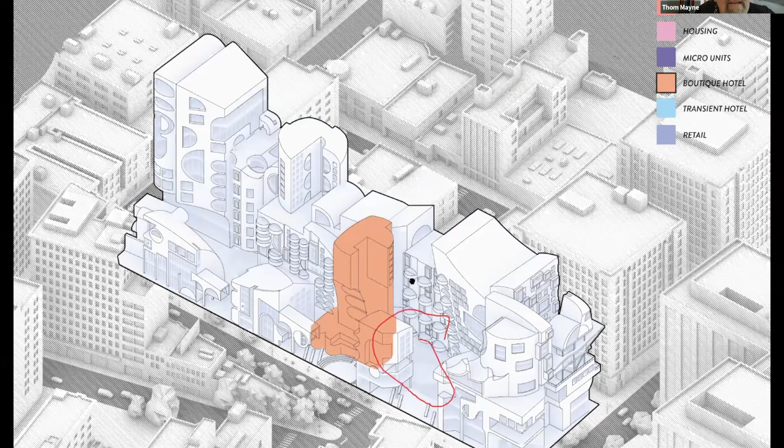Go back to another one. Is there another one that shows it that gives you an idea of the complete, and then you're showing pieces. And it seems like when you're showing, any of these are fine. Yeah, okay. You're going to show, I don't quite get it yet. This doesn't seem as interesting as some of the other ones that they interlock.

Because now you do have kind of, it seems like one on one level, and it seems like it gets more interesting as you can locate these three-dimensionally, right? That it becomes a very, very different idea urbanistically as you do that. And then we could argue with the breaking down, and I imagine we'll hear from everybody.

It's so clear, your idea of challenging the scale. And I would have thought you could have found something a little more connective tissue, understanding that this ensemble isn't on its own in an empty field or starting a new urban strategy, but is in fact attached. There are places you could have made useful connections, and found a middle ground between your scalar interests and the nature of the found pieces within this urban context. But there's a super clear idea. You agree?

Violeta, yeah. But it seems like for me it would have started with the public three-dimensional space. It's an extremely interesting idea. That's super useful, thank you.

Yeah, I think I tend to get stuck in a binary. Definitely need to work on that.

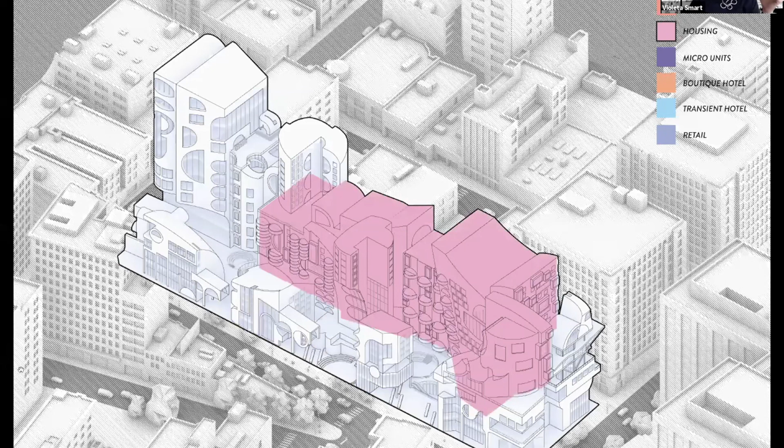When we started with the first exploration, I was interested in thinking about how circles and lines could come together to create volumes, and how those could interact to create an interstitial space between them. So I landed in this language because it allowed me to manipulate form in a way that was controlled but also complex, and that developed into the form.

I think I'm more about fenestration. Well, do you have your original models? Yeah, here they are. Those are really great.

It was towards the end of your presentation, you showed a few photographs. Oh, the final ones? Sorry, my computer's acting up. But yeah, I'll go to them. Those early studies you did are just incredibly successful.

I think when the whole buildings become more caricature or character, rather than a more conventional massing with the windows becoming a character, I find that more compelling.

Violeta, could you go towards the end of your presentation and show those photographs? Yeah, I'm trying to get there. Sorry. Oh, I see, maybe if I exit it'll be easier.

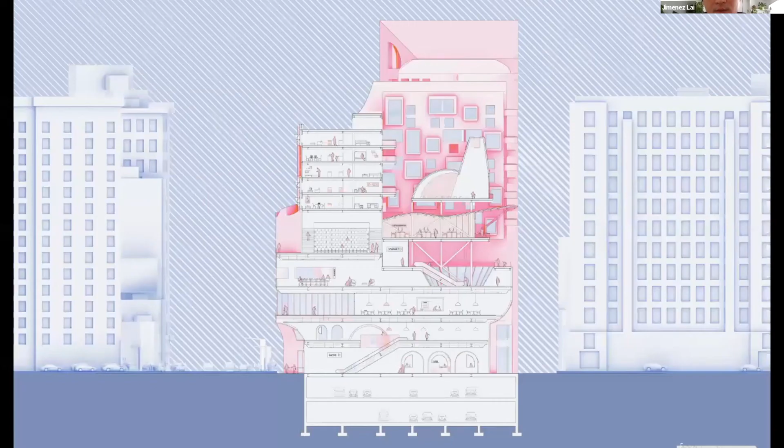Yeah, I have a couple things I want to respond to Lisa about, but I also want to say something about Thom's naming off of references. As you were naming the influences, potential references, I was sitting on the edge of my seat waiting for Ricardo Bofill, but he didn't show up. I was really surprised, because I feel like if anything this is closer to a Bofill diagram than to Charles Moore or Moss.

Violeta, you went past it, by the way. I know, struggling with the computer, but I'll get to it. I'm so sorry. Oh, don't be sorry at all.

No, I really love the scheme. I think it's a super fantastic project, the entire premise of it. And when we're able to look at the photographs—there we go. It was at this stage, I feel like you really had me.

I was really wanting to imagine the narrative you wanted to bring to the table with this story about restorative justice, and what type of backdrop, what type of sensibility, what type of urban fabric brings about such sensations.

As I think about that, I think about the textures of certain films. Like the film Roma, a Mexican film—there's a kind of silent sense of sadness against a highly chaotic density, and that combination really brings about that sense of sadness.

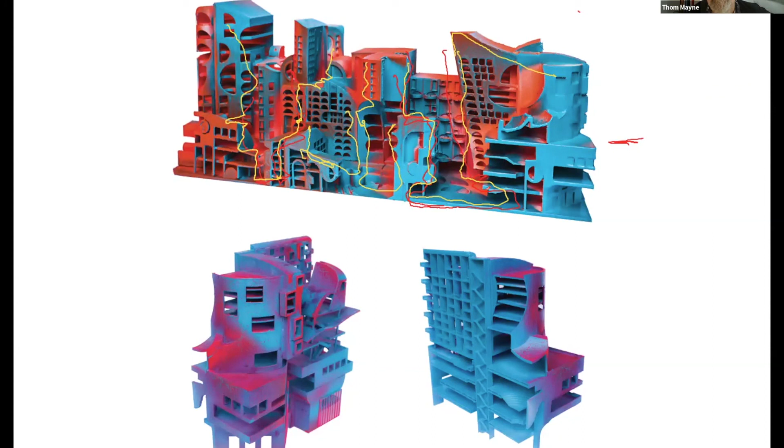Well, your first models were so clear—you should have stopped here. As you filled everything in, it seemed to me... I'm looking at this, at the spatial qualities, and there's some things happening, and there we go again, something going on in public, etc. It seems to be just loaded with urban spatial ideas, and as you get to the renderings, it diminishes it. It feels very thin.

Go to one of your renderings—it feels kind of highly stylized, and to me it takes away everything about it. I go back to your early model, your first ones, and it seemed so clear, as they're kind of stripped down. You're not worried about every little surface, this stuff—you're not ready for that yet. And then even your coloration, you're kind of playing games with it. To me, it's just not working.

In the first one, go back to your very first slide. It might take a little bit, but I'll get there.

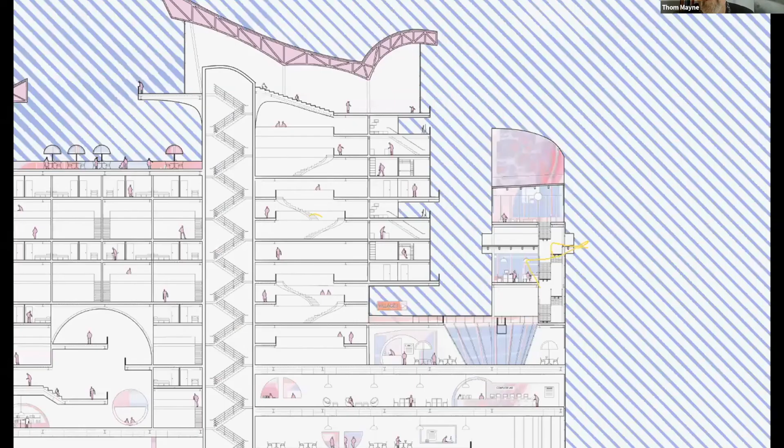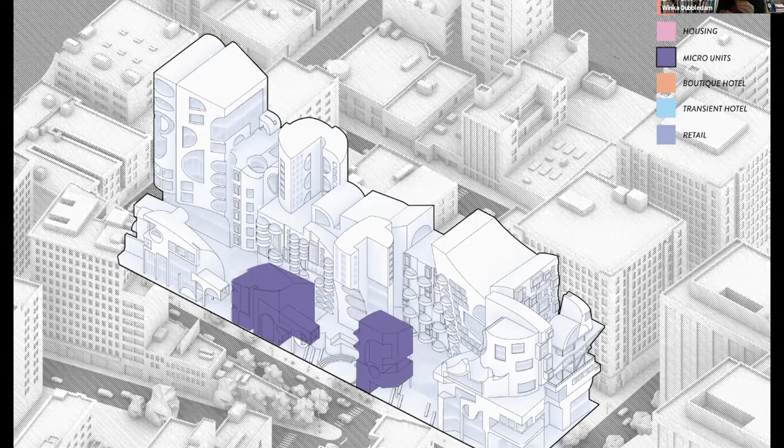I think everybody commented on the simplicity and solidity of the first models. I think the moment you, Violeta, put this really large opening with this very commercial-looking glass in there, you changed something that was about villages, solidity, hyperarticulation, into thin surfaces with glass surfaces that are too large—you distort that initial study that is really about little alien forms, really beautifully articulated, very new and interesting. It's very different than these drawings.

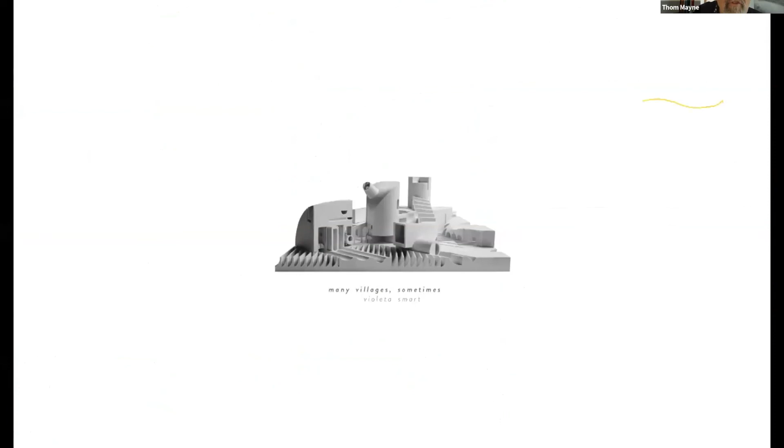Yeah, this guy—you look at this, and I'm looking at the choices you made, and you added balconies instead of subtracted. You're not even clear yet how to deal with the form, whether it's additive or subtractive. Looking at here, I would have gone right away, no question, it's subtractive—there's not even a conversation here, really straightforward. You don't want an added piece to this. You've got a form that already has complexity and a subform, and it's floating.

You're there, right? And then you're looking now at something more complex in your scheme, because there's many more of these, and there's the spaces between that are making the actual public urban space, which seems to be the project. It's super clear—I would have just stayed right here, and you'd have been fine. Well, you know, the world is non-linear.

I would just turn your presentation inside out, end with this. Because I really think you found something interesting and new here that is really worth it. Honestly, it doesn't need much more detailing, because it's all about the fact that it isn't over detailed, and that it is quite solid, and that the openings are just consequential to the big solid. I think that would be a really great discovery, right?

The moment you get into thin surfaces and large commercial glass planar sheets, you lose that kind of invention, or that moment where you have an interesting, strange character that you found in this architecture that has completely its own logic. I think that is hard, no? So that's an amazing thing to find. And to be honest, every design process is non-linear. So to me, I'm perfectly fine if you turn it inside out.